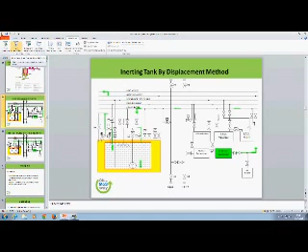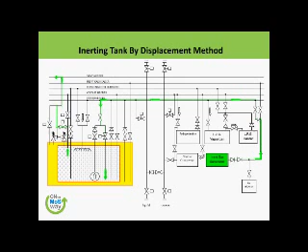So next step - just before going to the next step, I want to make clear that the method which we used yesterday was the displacement method, which is a relatively faster method. It saves our time.

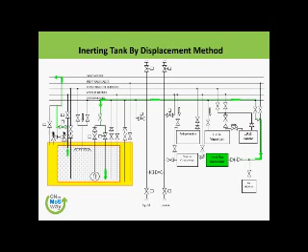Now, what we want to show you also is that there is a dilution method. This is the dilution method. We are starting our inert gas generator, although we haven't used it on our system yesterday in order to do it fast. Here we are sending this down from the spray headers and taking it out from the bottom lines, pumping it out, or giving it to the vapor header to the mast riser.

But again, I told you yesterday that this will take a very long time. We will have to run the generator for a very long time, and of course displacement is comparatively the better method if we have got the lines available, and we can also monitor it very clearly, because in a displacement mode we have a reasonably clear interface between the inert gas and the air, and vice versa.

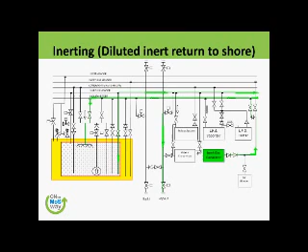So let's press on to our next subject after the inerting. Now we have no air, so we are sure that there is no air in the system, so we will never go into the mode of a gas explosive environment.

Now, class learners, can you tell me what do you think gassing up is? Gassing up with nitrogen. Yes, I agree - gassing up, or like inerting. Yes, we have done nitrogen work, haven't we? We have started the nitrogen generator, we have put it in interbarrier spaces. You remember we have even given it to the compressor, the nitrogen and all that.

Gassing up is - now, this is the first time you are going to put in the hydrocarbon gas. Can we put liquid inside the tank? No. Why? Because my tanks are at ambient temperature, my lines are at ambient temperature. If I introduce liquid at minus 161 degrees, it is not really going to benefit, because it will give the tank thermal shock, the lines thermal shock, and the metal contraction will be so fast that it may break or the joints may open.

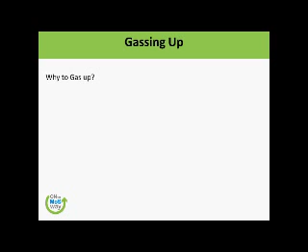Okay, so we need to do the gassing up. Gassing up is a way to gas up - the tank will be cooled down below dew point. We will first gas the tank at ambient temperature. Then slowly we cool the tank - that is called the cooling process. And then there's dry ice deposition of CO2.

IG contains 15% by volume and occurs at minus 78 degrees centigrade. This is the biggest problem - minus 78. Now what have you done? You have removed the oxygen from the tank by putting in the inert gas. But now what you have done is put in the carbon dioxide. You remember we were checking the carbon dioxide with our portable detectors yesterday in our tanks? The carbon dioxide rose from 0.4% to nearly 10%.

That is an undesired situation, because what will happen if we straight away give the cool gas to the tank? The cool gas is going to sublimate and become ice. Imagine minus 162 degrees being sent into the tank, diffusing and giving a very sharp cooling effect. What will happen? All the carbon dioxide will shower down the tank like ice crystals. You will have a snowfall in the tank. I hope you are imagining this clearly.

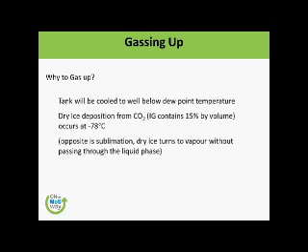Gassing up is technically a process of replacing inert gas with methane gas, CH4, or LNG in the gas form, not LNG liquid. Inert gas contains uncondensable gases. This is a problem, because if we are running the compressors with inert gas present, the compressors or the liquefaction plant will have a very hard time. We want to get rid of every single molecule of inert gas so we have no problem in the reliquefaction plant, because some gases in the inert gas system will never condense under normal conditions. Nitrogen and CO2 cannot be condensed by the ship's reliquefaction plant. So this is the problem.

And venting to atmosphere is subject to MARPOL Annex 6. I'm not going into detail, you have got the material, you can read it.

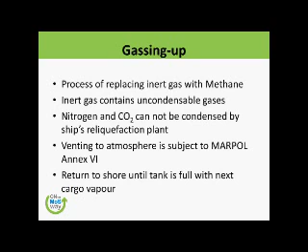Gassing up at sea is only available to fully or semi-pressurized vessels, often with deck tanks. On your bunker barge you may have this kind of facility, or the gas may be provided by portable containers or something like that. The industry is evolving. Ship owners, barge owners and others have two main objectives: save money and save time. But no one compromises safety. So the industry is evolving, finding methods to save time and money while making operations as safe as possible.

So before commencing gassing up, O2 content of the tanks should be less than 5% by volume. We definitely want that; we prefer it to be much lesser, even a couple of percent. So once we start the gassing up process, even before touching the shore, when the exercise starts, please go and check the gas, check the O2 content at different levels of the tanks. Then you will be sure there is no oxygen in the tank, because if there is oxygen, we need to inert it more, to make sure no part of the vessel, even the pipelines, equipment, machinery, or tanks, ever reach a point of explosive range or the right mixture of oxygen and hydrocarbon.

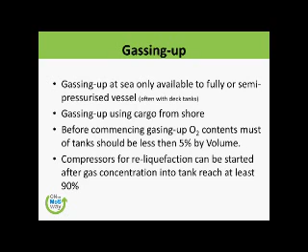So the compressor for reliquefaction can be started after gas concentration in the tank reaches at least 90%. In the next exercise, we are going to test our environment at different positions using portable gas detectors. Then we are going to do a hot ESDS test, which I'm going to explain a little later. Any questions so far? No? Let's move on.

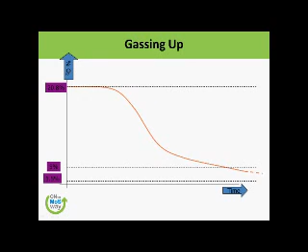So what are we trying to achieve in this gassing up? This is an explosive range diagram. The lowest level where we think the LEL is below 5%. So in the gassing up process, what we are trying to do is bring the oxygen level from 20% to this percent. We have already achieved that by replacing the oxygen with inert gas. So gassing up now is a very safe process.

So how do we gas up? We have our ship tank filled with inert gas, and a shore tank filled with liquefied natural gas and a bit of vapor. Is this vapor enough for filling our tanks, 5 or 4 tanks? No. So either they create vapor through a vaporizer and give us the gas, or we take the liquid from them, vaporize it, bring it to the right temperature, put it in the tanks, and keep cooling it down. Initially we will put in the gas at more or less ambient temperature or just below, and slowly while gassing up, we keep reducing the temperature.

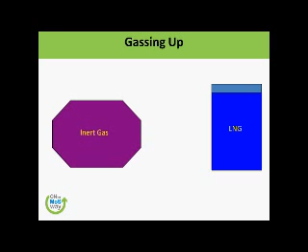So this is what we are doing. We will ask them to pump the liquid from shore. It will go up to the Chiksan arm, and then we will pass it through our vaporizer. We will give steam to the vaporizer, and then we will put it in our tank.

Now, at this instant, I want to ask you where we are going to introduce our gas, from the top or from the bottom? Yesterday we put the inert gas from the bottom, isn't it? Why did we do it? So that it gets into every part of the tank. And why did we do it? Because you remember the name from yesterday?

NAIL. Nitrogen on the top, lightest. Air just below it. Inert is heavier than air. And liquefied gas or LPGs etc. Mind that methane below minus 100 degrees is heavier than air. And above minus 100 degrees, it is lighter than air or inert.

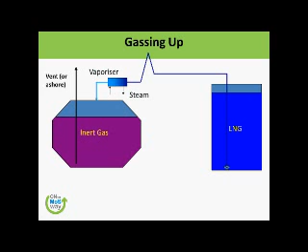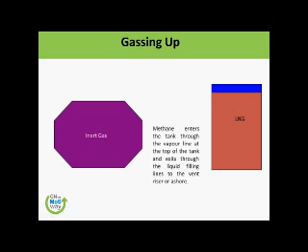So folks, this is the process for gassing up. Methane enters the tank through the vapor line at the top of the tank and exits through the liquid filling lines. So this is what we are doing, throwing the LNG and pumping it out. Now, this is something I want you to note down: our maximum outlet temperature of the vaporizer should not be more than 80 degrees centigrade.

Why like that? Because most of the pipelines have got polyurethane or foam type material on it, and they melt around 100 degree centigrade temperature. So we do not want to heat up our lines where we may be damaging the insulation on the pipes. Mind that if insulation melts, the thermocol type material will create a gap in between the pipeline, and that gap could have icing or frosting on it.

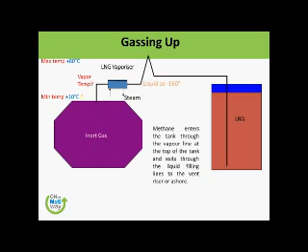Compressors, motor room arrangement, this is our arrangement. IGC code 10.2.4.2, you can have a look in the IGC codes, folks, and 2.4.3 give us the gas tight seal through the bulkhead, which is this requirement.

One side there is positive ventilation and the other side negative ventilation. Can you see here that the pressure is built up here and there is a positive pressure. This is the room where there are electrical panels and electrical motors. We need to keep this environment clean. No hydrocarbons should ever come here.

So we have an airlock system where technically you open the door to enter. Airlock doors, gas tight doors. You close this door, and only then the second door will open. So in this process, because this is under high pressure or positive pressure, the fresh air will go out, and no hydrocarbon from deck can come inside. Are you getting my point?

And vice versa, the compressor room has negative pressure, suction from the top and from the bottom. So here again, because there are gases here, to enter these rooms there would be a proper procedure to get into. Not an enclosed space procedure, but if your company or organization is considering it enclosed space, then yes, you can have procedures for it.

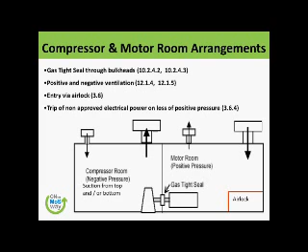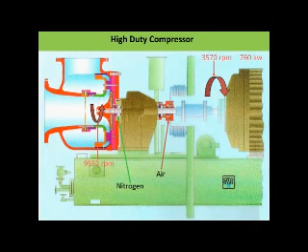All these different systems of cooling, nitrogen supply, etc. So the gas comes in. If you let it run on a zero angle, there will be no gas movement, although it is running at 10,000 RPM. It is like a fan angle or propeller angle. If you keep a variable pitch propeller on zero pitch, it is not going to move anything, isn't it? So the vanes we will have to set, and this experience you will get today in the working here. Now this is the same vanes, exactly like an aeroplane thing, like a gas turbine, aeroplane turbine.

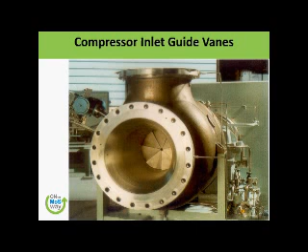Can you see these points? These are the ones, and you are controlling this from the simulator. So please be very careful when you are operating this on a simulator. Don't assume that it is just a video game, or think about what is happening behind it. So do it very gently. These are some inlet vanes, where you can see different angles on different vanes. And of course, every mechanical thing is outside. Very simply, it is just the blades which are inside.

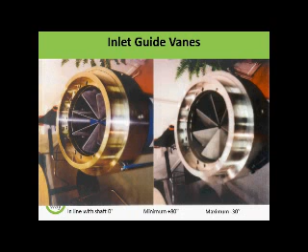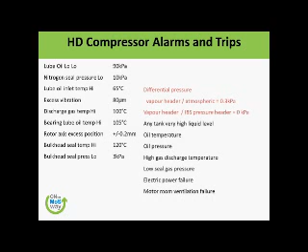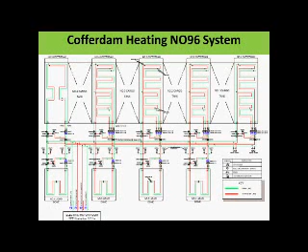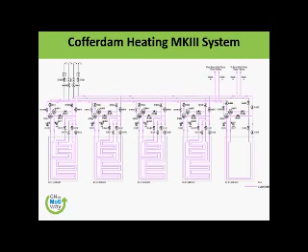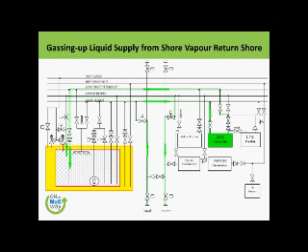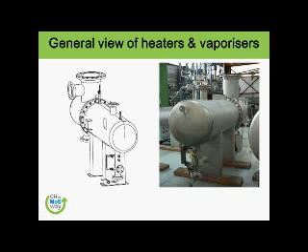To vaporize a liquid for gassing up, the operation of purging inert gas from the cargo tanks before introducing cold liquid - during cargo discharge, if no shore vapor return line is available, we need sufficient vapor from the liquid cargo to prevent formation of vacuum in the tanks. Yes, when you're discharging the cargo your tanks are getting empty. If you do not fill vapor in it, it's going to collapse inside and go into vacuum, isn't it? So we need to have vapor. Many good ports we'll get the vapor from shore, but sometimes we'll have to generate our own vapor, and that is what the vaporizer does.

On a bunker barge, the pressure type vessel, we are discharging by creating our own vapor and putting it back into the tank, creating pressure inside the tank, pressing the liquid so it will go automatically for bunkering. Means we are not using pumps or anything like that - it's just pressing from the top so it will go out. If we manage that pressure, we can manage the flow of liquid. So no physical cryogenic pump is required for pumping or bunkering, only by pressure we can manage it. And on the other side, that is where we do not want any vapor coming to us from the shore.

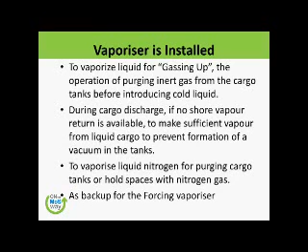Forcing vaporizer we normally use for supplying boil-off gas to the engine. So this is how the LNG vaporizer is working - courtesy to CryoStar again - we have the liquid coming in here. Liquid is passing through these lines, getting heated, and going away.

Now, how will we maintain the temperature? Because steam can vary - steam is coming in, steam is going out - so steam temperature can vary, or your liquid flow can vary. So maintaining the outlet temperature is very difficult. So what we do is have a bypass liquid line here. If we have too high a temperature - for example, initially I just want 10 degrees, I don't want 50 degrees - what I'll do is spray it here and maintain the temperature. So this valve can be controlled automatically. If we set the temperature here, say plus 20 I need, whatever comes out would be plus 20, because if it's high it will just give a little sniff of liquid in it and maintain the temperature. Are you getting me? So it's kind of dosing the liquid.

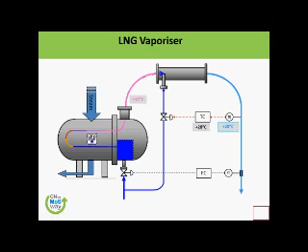And this is the steam chamber, and I'll show you the coils in a minute. There you go. So folks, now you're able to see the coils. Okay, this is your steam chamber - this area no gas will come, only the gas will go in the tubes. All the tubes from the bottom go, get heated, and go out.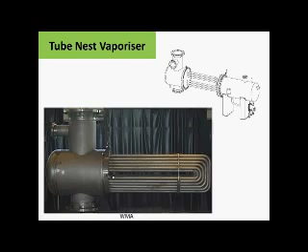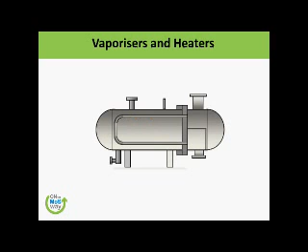Happy? This is the same thing, now we have opened it. This is again the vaporizer, the same vaporizer in detail. Shell - we're now giving head, we call it head. You may have noticed that we fix this thing from here and leave the other bit nearly suspended for expansion. This is your tube plate, a very strong plate, inlet chamber where the liquid is flooding inside the pipes, U-tubes for taking it out. So why are we using U-tubes? Can you tell me? The edges have got more stress. Okay, so the U-tube, okay.